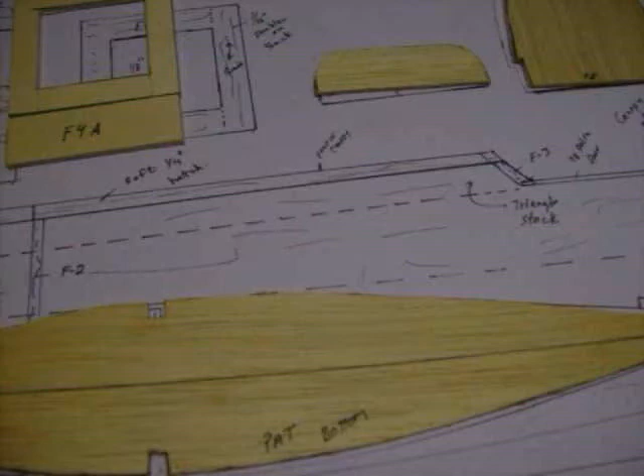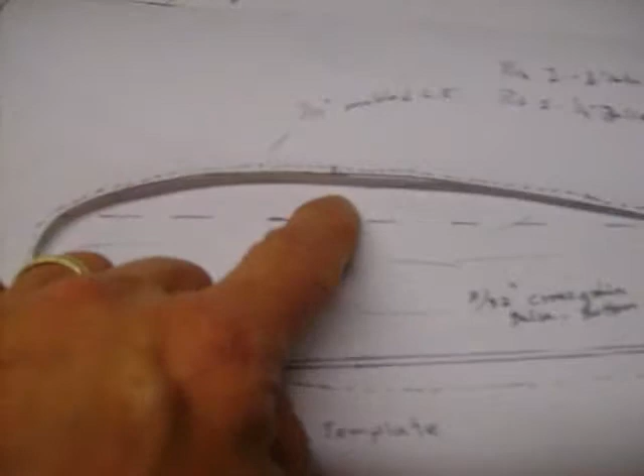Before you cut out your rib template for your fuselage, you're going to want to make your rib template first. As you can see, I went ahead and cut out the rib template. Notice that you leave the dotted line here for making your rib template, because the dotted line represents the sheeting that's going to go around the outside.

When you make your ribs, you don't want to make them the size of the sheeting, or you'll end up with a fatter wing than you need. Not a huge deal, but I would just cut out the solid black line all the way around the template and leave the dotted line on the page. That's just representing sheeting you'll do later on.

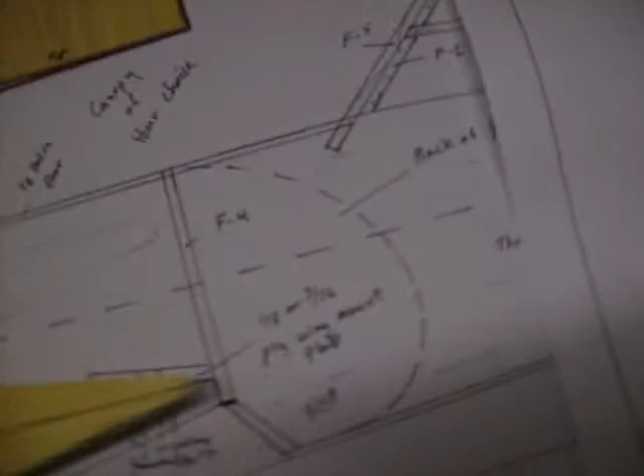Then when we go to cut out the fuselage, you can line up your hatch marks, or your spar marks, right here and here, and then line up your tail, so everything's right on the black line of the fuselage. If things look good, that means you did a good job cutting out the template and tracing it down onto this.

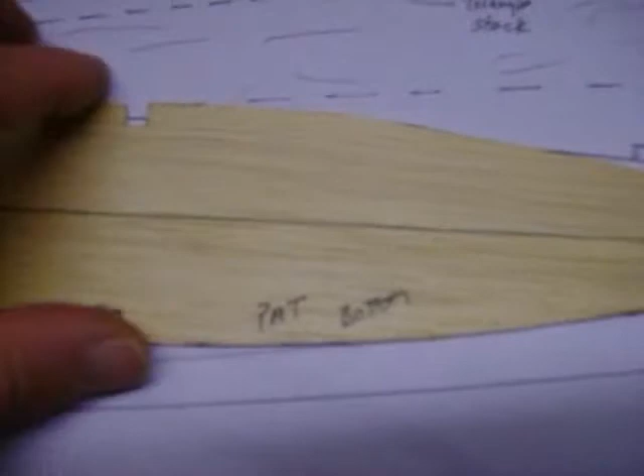As you can see, I wrote the pat bottom. This is our pattern, so I'm going to use this piece of wood to cut out all my ribs, because I know that'll be the most uniform for everything. You don't want to cut a rib, then use the next rib to trace the next, because you get a growing sensation.

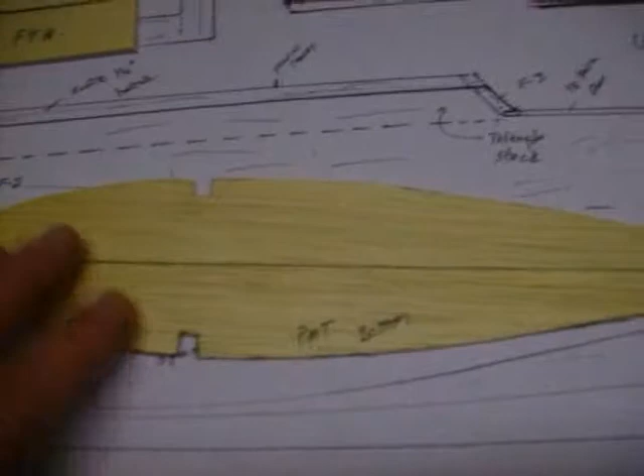By the last piece of wood, you've cut 10 pieces, and the 10th piece is way bigger than the first, because you're growing every time you trace and cut, depending on how you cut it, unless you're cutting the inside out. So it's best to just make one pattern and use that pattern for every rib, so every rib comes out as close to the same as possible.

On your rib template, make sure you put your center line on. You just want to put a center line on your rib. That way when you're tracing out your ribs onto other pieces of wood, you can go ahead and mark your centers, and you won't have to find the center of every piece.

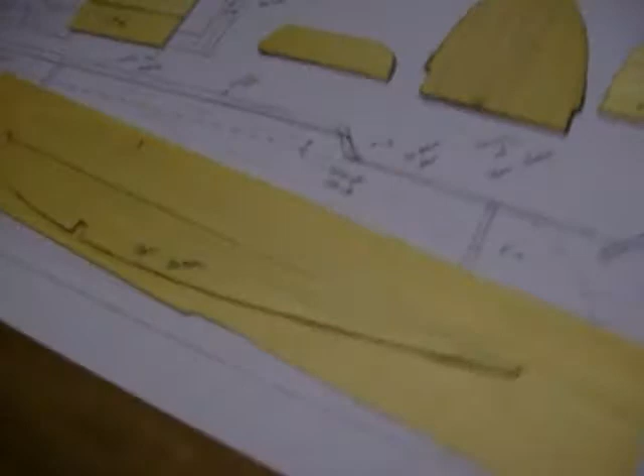So basically, I'm going to take whatever piece of wood I'm putting on here and trace out the outline of my pattern. You just take your pen, go around everything, trace everything, and then at the very end, as long as you haven't moved your pattern, take the marks you made and mark a center there, and mark a center in between your notch.

Just use a tape measure and get your quarter inch on both ends, then take a straight edge and connect the dots. So you put your straight edge down and just connect the dots.

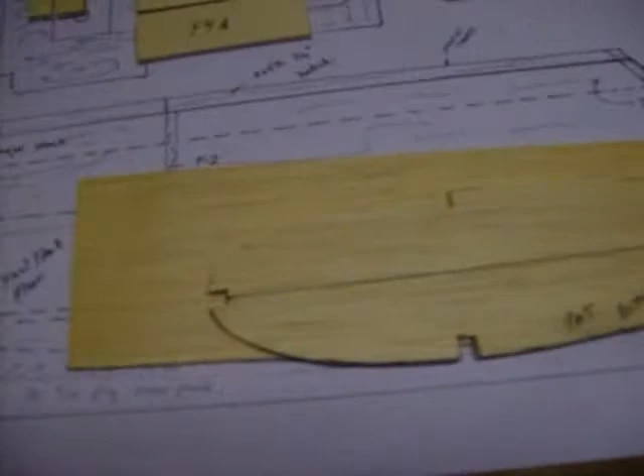Like I said, after you get your pattern done, mark your center line on it. After you trace your pattern, you can also use the center marks by marking them here and here, then just draw a line, so you don't have to measure every single piece for the center line.

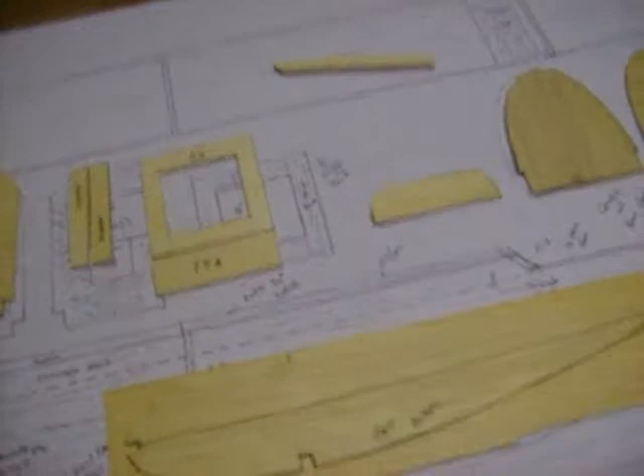Another way you can do this is get your rib template, and if you've got the wood to spare and you're one of the lucky people with a bandsaw or scroll saw type thing, you can just stack 8 pieces of wood together, since you're going to want 8 of one kind and 2 of the quarter inch for your wing tips.

You can just stack all 8 or 10 pieces together in a square, stack all your wood, take that template, draw it out on top, and then cut all 10 pieces out at once on a scroll saw. That's the nicest way to do it.

But I don't have a bandsaw or a scroll saw, so I'm one of the lucky ones who gets to actually take my X-Acto blade and carve each piece out.

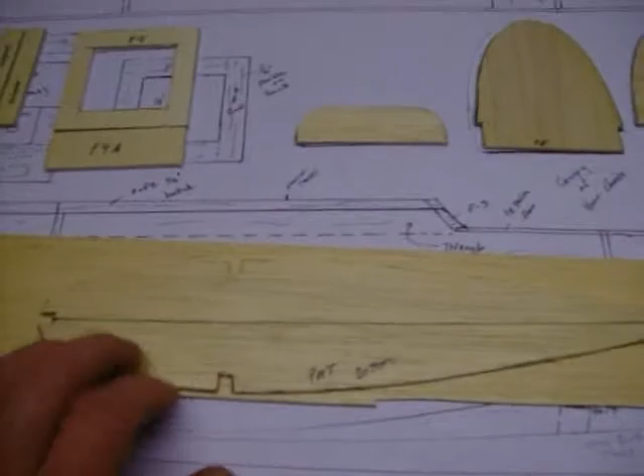If you really want to, you could take your quarter inch stock that you know you're going to be using in your grooves just for your template, and make sure it fits in there nice. If it stands in there nice and tight and snug, that's how you want it.

On the front, you want the front part of your template to be perfectly flat with the top part of the quarter by quarter spar, because you're going to have a piece of one-sixteenth that goes right up and over the spar to stop there, and that's where it'll pick up the cap strip, and the cap strip will finish off the run to the back.

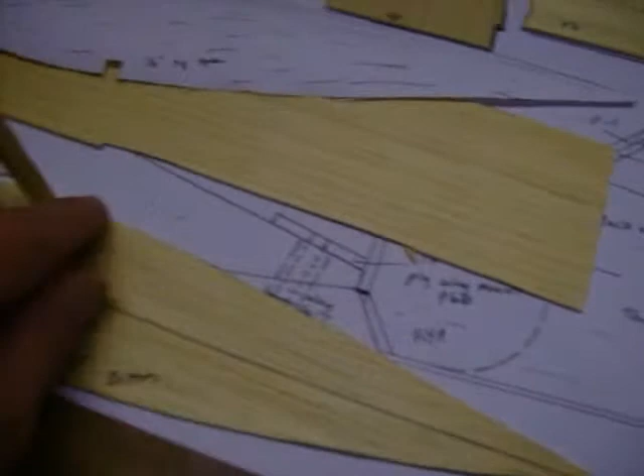And I think that's about it. So don't make your cuts too big for the slots, because you don't want this thing to be sloppy in there. You want them nice and snug. Once you get your quarter inch fit, that's what you go with—cut each piece to that.